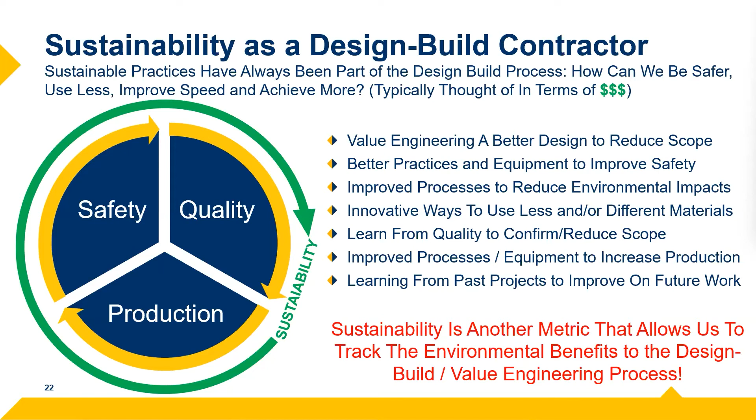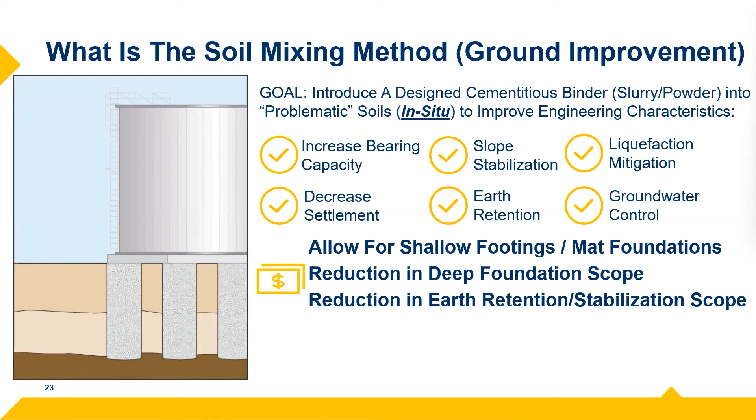One of those ways we use value engineering, specifically here in the Gulf Coast, where we see softer compressible soils, or in areas where we have loose, liquefiable granular materials, is the soil mixing method. It's a ground improvement method where we're basically using our tooling to mechanically disaggregate the soil, add this designed cementitious binder, and improve the engineering characteristics of the soil, whether it's bearing capacity or earth retention. And the end result here is this stabilized material.

Now, if I saw this in the real world, obviously I'd use my stop work authority. We don't ever have someone walk out onto an unbraced system like that. But just for the view of showing that, we've mixed these columns, you can still see characteristics of the parent soil, but now we've greatly increased the compressive strength, so we can dig around it and have these freestanding columns for observation.

The monetary benefit is that we can take things that might have had to go on deep foundations and move them back to shallow foundations and mat foundations. We can combine soil mixing with other deep foundations to reduce the overall scope. So yes, we're adding another technique to the process, but in reality, we're reducing either the deep foundation scope or the earth retention scope. And so there's that monetary benefit of using less, going a little bit faster, which of course the owner and everyone likes to see.

But there's also a sustainability impact of that. We're producing less carbon, we're consuming less cement and steel. Concrete and steel obviously are very heavy carbon producers. And another benefit, of course, is that we're decreasing our material dependency. As things become scarcer and more expensive, the less we use, the greater the overall benefit to the project.

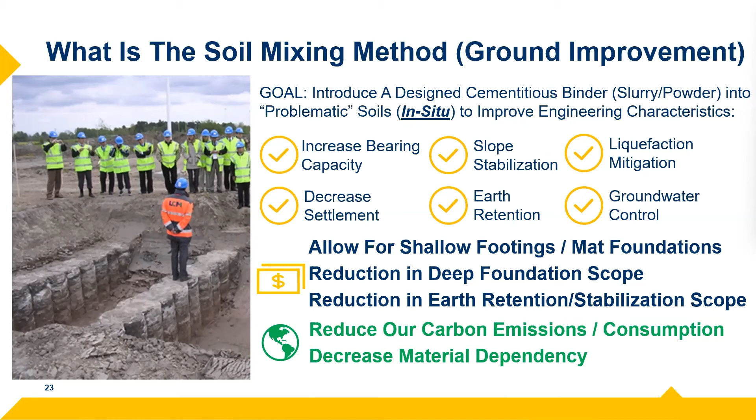You'll see a lot of contractors around the globe have developed their own proprietary equipment. These are purpose-built tools that we're using to mechanically disaggregate the soil, break it down, get that cement or that binder slurry into the ground, and really get a good mix, a good quality to get the soil cement, the soilcrete, well mixed.

Here I'll focus on wet mixing methods. With wet mixing methods, we're injecting a grout slurry, a fluid slurry, into the ground to help with the soils. And we have a number of solutions, pieces of equipment and grout designs that we can use that are tailored for these site-specific soils and intended use. So there's another layer there: we're using this method, we've got the purpose-built tool that we need for that purpose, and then the grout design that is tailored to the site-specific soil.

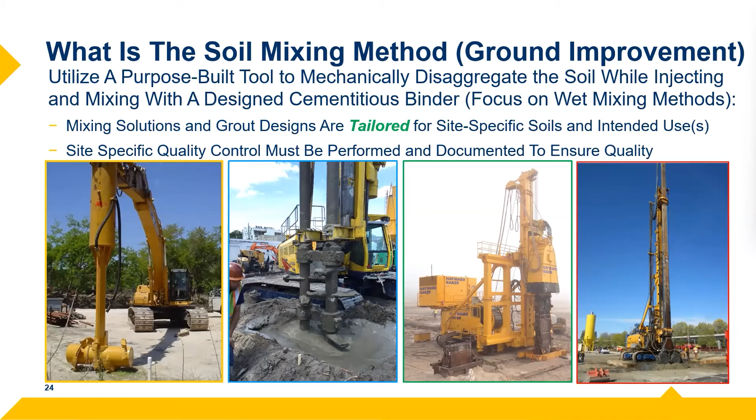So again, we're really focusing on making sure that we're using the right equipment, the right design, and we're minimizing the amount of effort and the amount of materials that we have to use. What I wanted to do in this presentation is look at a broad general use of the site-specific quality control program to not only ensure quality, number one, because we need to make sure that what we're producing is up to specification, but also how that relates to the sustainability aspects, these new metrics that we're trying to measure ourselves against.

The first thing to understand is that as we're injecting this grout slurry in the ground, which is a combination of the binders, water, and maybe some other proprietary materials, we're really creating a chemistry experiment. The cement's going to hydrate, it's going to react with the water, it might react with the soils in the ground. So we need to treat each site, each geology, as a chemistry experiment. We have to understand how the grout slurry is going to react with the soils, and be able to modify our designs as we move through the quality management process to get the soilcrete to the right mixability and the right quality.

Here you can see two videos I took. It looks like the video on the left stopped. But when we have a not optimal grout design, you can see the soilcrete that's coming to the surface is very chalky and stiff. It's going to be difficult to mix, it's going to take more energy to mix, and it's going to be difficult to sample. Typically, we'll grab some wet grab samples of the material before it cures to put a couple cylinders together for compression testing. The material on the left is going to be difficult to do that with.

As we optimize our grout design, we'll see that the material looks a little bit more fluid. It's going to be easier to mix. In this particular case, we can go about 40% faster. That's a huge change in production with a small change in grout design. It's also going to be easier to sample.

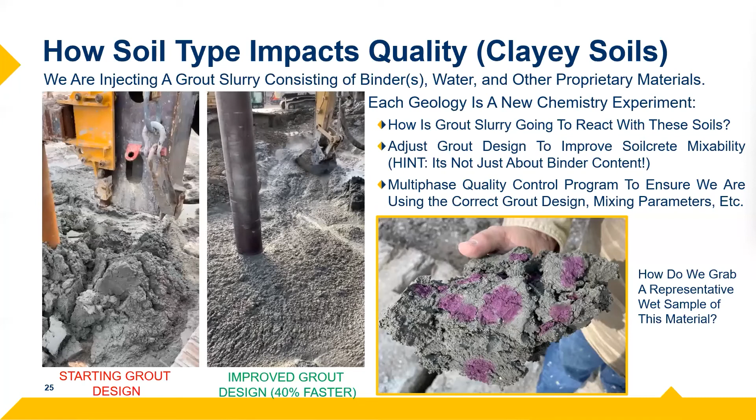The first phase of this will typically be a laboratory testing program or a bench scale program. A lot of contractors use different terms to describe what they're doing. But the basis of the program is to go out in the field, collect the soil samples that we need so that we can classify the soils, understand what these materials are, and then in laboratory conditions mix them with different grout designs so we can understand the mixability and get an idea of what the strength is going to be. That way, when we move all these big pieces of equipment into the field, we have a good understanding of what that grout design needs to be. So instead of sitting out there and waiting, we can get to production and make sure that we're using our time well.

When we think about clay soils that are active, they react with water. You put water into clay and it wants to suck it up. It wants to do its little chemical reaction and have its process done. And so what we find is that adding water and cement to that process further complicates it a little bit, where we find in the lab, when we're mixing grout with clay soils, there's a point where we have the right amount of water in the grout to get us the quality we want. And it's different for every soil.

Here you can see that we've tested 4 different samples and we've prepared the grout at different specific gravities. As the specific gravity is lowered, it basically implies that we're adding a little bit more water into the mix. What we've seen a lot of times when we mix at the wrong grout design and get these low strengths, the gut reaction is typically to add more cement. Well, let's keep adding cement until we get the right design strength that we need.

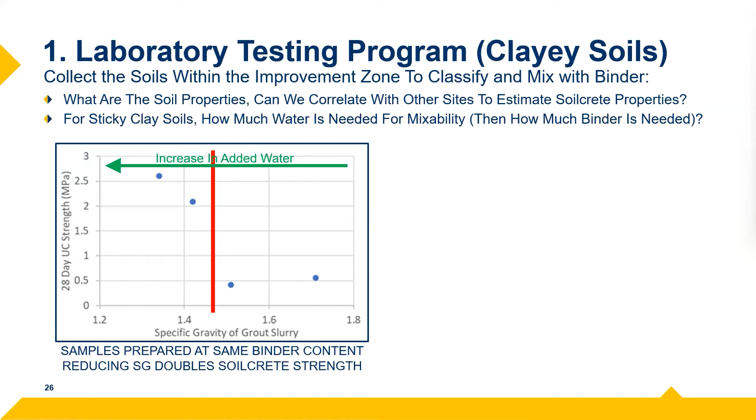And you can see how that correlates with how the soilcrete works. If we're not adding enough water, if the grout's at a real high specific gravity, we get this chalky material. It's going to be difficult to mix. It's going to be difficult to sample. So we would expect strengths to be a little bit lower. And as we get that better mixed material, a little bit more moisture in the ground, it's easier to sample, it's easier to mix, and we get this better quality.

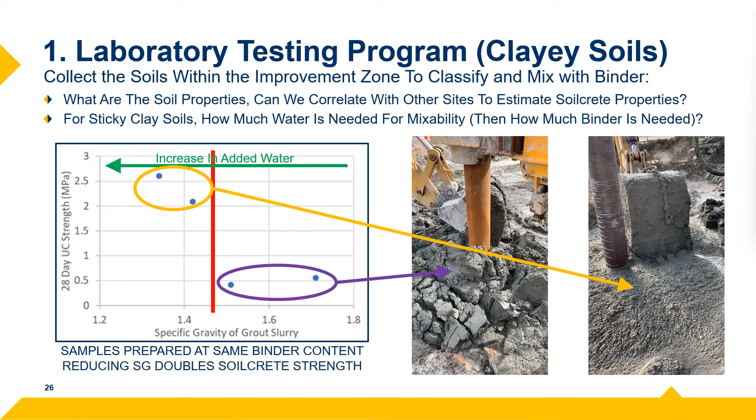We have the equipment and tooling now, which I'll talk about a little later, that allows us to zone out these profiles so we can target the more problematic zones with a little bit more binder, a little bit more grout. And in zones where we're getting performance closer to where we need it to be, we can actually reduce the binder. So we don't have to use a single grout design for the entire program. We can zone out with depth along the profile so that all we're doing is making sure we put the right amount of cement in the ground.

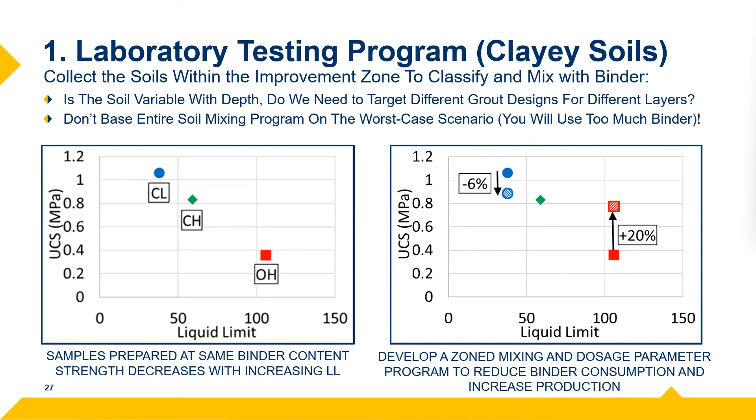See here, it's not moving forward. There we go.

So we've run our test program. We're pretty happy with our grout design. We think we understand what the performance is going to be and what the moisture content needs to be to get into the ground. I'm a huge proponent of installing what I call calibration columns. A calibration column is basically us confirming what the lab is telling us and making sure we're on the right track before we start grabbing samples for QC testing to make sure we're conforming to design specifications. The benefit is that we're out in the field, using the real equipment we're going to mix the soil with, so we can really see what's coming out of the ground.

We can really grab the Soilcrete, run samples. Here you can see we grab the Soilcrete core to get a good visual observation with depth. So those visual keys right there are really giving us a lot of qualitative information to say, well, the grout looks good. It's going to be easy to sample. We're hitting the production rates that we think we need to be at. And then we can collect samples for testing and benchmarking.

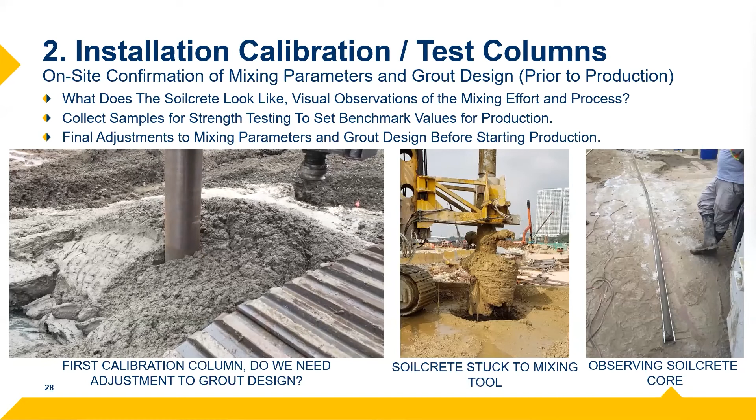And the other thing we'll do is we'll say, okay, we think we're kind of close to where we need to be on this grout design, on this mixing program. We'll start installing calibration columns at different cement contents, at different specific gravities. So again, we come up with this lab study, this field study to corroborate what we saw in the lab.

And so here again, we go out, we mix at a couple different specific gravities, a couple different binder contents, and we're just trying to calibrate ourselves to make sure that when we go into production, we've got everything set the way it needs to be. We're using the right amount of cement, we're using the right amount of binder.

And again, here you can see the radical effect that having the right amount of moisture in the ground will give us, as compared to adding more cement, right? We added more cement on one of the columns, and we don't see a huge improvement in compressive strength of the stabilized material. Really what it was is it was just adjusting that water.

So a lot of times what I use these slides for when I'm talking to consultants and owners and showing them our process is that when we see things that might not look like the strengths we want, the gut reaction shouldn't be to throw more material at it, right? We shouldn't just throw more cement at it, throw more binder at it until we get the strength. We really need to calibrate ourselves very carefully to make sure that we're not wasting resources, wasting time, and wasting money.

Now, I've shown two examples here where if we lower the grout specific gravity, i.e. we add more moisture to the ground, we get better performance. Again, every site is different. Every site's a science experiment, almost a different chemistry experiment. We go right down the road and we see the opposite type of performance. So here, the more water we add to the system, actually the poorer the performance, because it's also based on the water cement ratio that's in the ground.

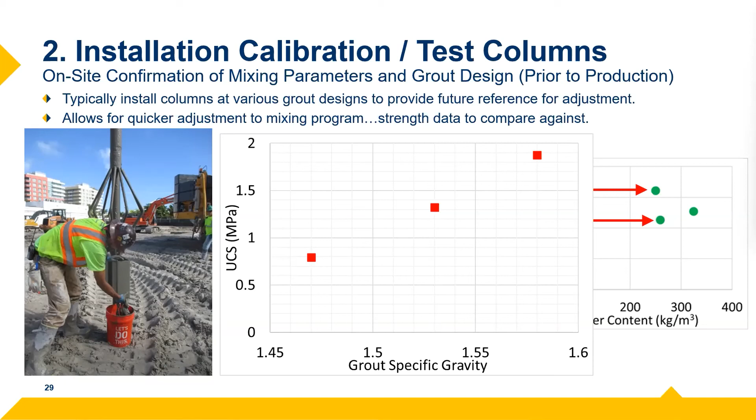So there's a lot of variables that get thrown in here, and I'm skipping a lot of stuff about soil geology and plasticity, organic content, deposition, mineralogy, and all that stuff, because it's very difficult to quantify those things in very simple terms. And so, like I say, go out there, run these lab studies, run these calibration columns, and you'll see a very big improvement.

So what I really wanted to talk about in this presentation is something that I got to experience firsthand. And that's the benefit of adding real-time data acquisition as part of our ongoing real-time quality control program. So as we move from the calibration columns to the test columns to the production columns, we're going to be running this quality control program as we go along.

And so before we had the computers that could monitor these things for us automatically, a lot of this stuff was done visually. And then there was a lag based on grabbing samples and testing samples at 3 days, 7 days, or 28 days. So there was quite a bit of lag in how we can adjust our quality control program. With the introduction of the data acquisition system, this real-time system that monitors all these variables for us, we've seen a huge improvement in not only quality, but in making our projects more environmentally friendly and a lot more sustainable.

So this is what the driller will see sitting in the drill rig. He understands how fast he's going.

He understands how much grout's going into the ground, the mixing energy, all these variables that we try to figure out during the laboratory testing program and the calibration columns. We'll set those and go into production with those so that the rig really kind of helps control itself, right? If it's going too fast, we're not getting enough energy, it knows to slow down. If it's going too slow and it's putting too much energy in it, it knows how to speed up. Putting the right amount of grout in the ground. It basically controls most of the aspects of the soil mixing program outside of the human things that we need to do.

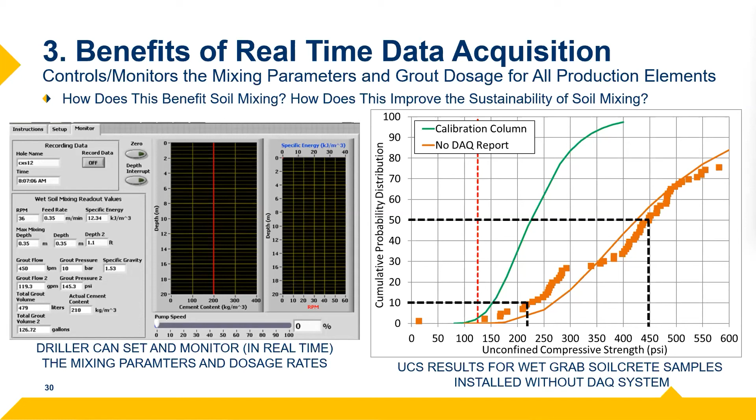So just for this particular project, with the inclusion of data acquisition, we dropped our binder content by about 20%. So that was a 20% reduction in cement we were using on this phase of the project. When we're talking about phases that are using 50,000 tons of cement or higher, a 20% reduction on each one of those phases is astronomical, really. We're talking about the equivalent of 8 million pounds of burned coal per phase that we're saving in terms of cement consumption.

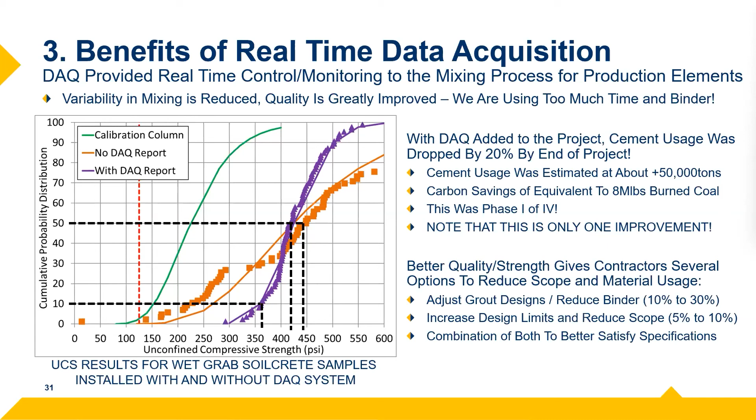So this is really allowing us to do a lot of things in terms of value engineering, in terms of quality management, to make sure that we're not using too much cement, to make sure we're not using too many materials, to increase our production, and again, to reduce our scope through value engineering design.

The last piece I wanted to talk about is don't forget what you've learned. So we spent decades trying to improve upon our quality programs to make sure we're using as little material as possible to get the best benefit, to get the best bang for our buck. And one of the things that I've seen happen time after time with different project teams on different projects all across the globe is that we spend a lot of time and effort developing these grout designs, modifying our tooling, modifying all these different aspects to improve our safety, to improve our quality or improve our production.

And then at the end of the project, the project team kind of goes on to the next project. Maybe we take some lessons learned or whatnot, but we've been as an industry somewhat not as great at really documenting the data that we've seen and using that as we move forward. And so what I always do is at these projects where we've had huge changes in grout design, or we've had great improvements in material that either gives us a higher strength or a better quality or a better production rate, I always have these little graphs I put together.

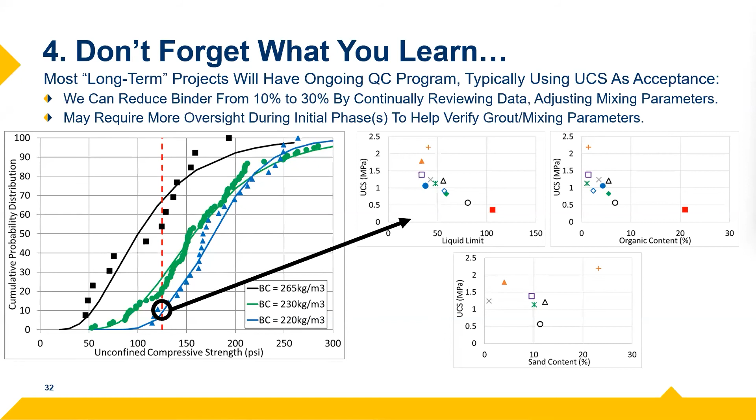And so just to summarize the talking points, I didn't talk explicitly about sustainability, but we mention it a lot because it's just ingrained in everything we do. And these quality control methods that we put in place to make sure that we're meeting the project specifications really also help us achieve these safety, quality, production, sustainability goals. And like Niall said earlier, when we see any improvement in safety, quality, or production, there's a lower cost, and we're providing a more environmentally sustainable solution.

So when we talk about providing these sustainable solutions, that doesn't mean the costs are going to go up. In fact, most of the time, every time I've been involved with a project where we're looking at a sustainable solution, the costs have gone down. So there's a cost benefit to that.

But we need to make sure that project specifications are written so that we can allow these real-time adjustments to our construction needs. Because if we are using too much, if we are doing too much, we need to be able to adjust ourselves and reduce our scope, reduce our usage. And I've seen a lot of project specifications where it explicitly excludes us from doing any changes.